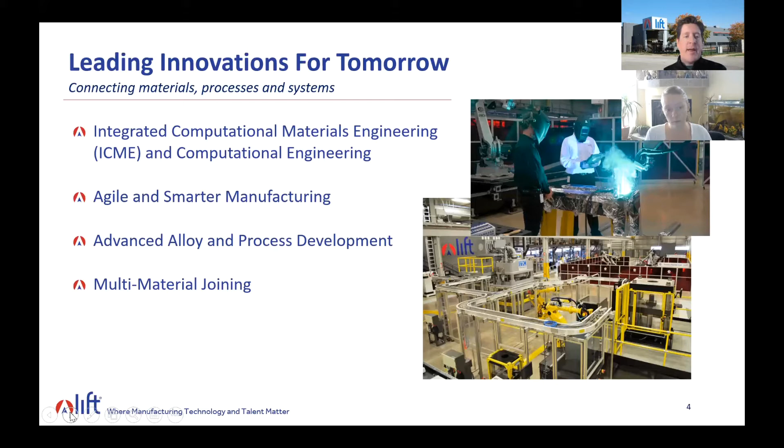So a little bit about the technology program. These are our technology pillars. All of the work that we do at LIFT falls underneath each of these categories in some way, shape, or form. All the way from integrated computational materials engineering to agile, smarter manufacturing, alloy process development, and multi-material joining.

A little bit deeper dive into some of these pillars. I'm not going to get into each of these, but if you have questions or would like to speak with someone on our team about any of these, please give us a call or shoot us an email. We'd be happy to reach back out to you and see how we can help. We can help you take your idea from concept to commercialization, further optimize it, whatever we might need to do to help you advance your technology.

On the talent side of the house, it is still about innovation, but it's more about learning tools, new pathways, new venues. We offer a program for high school students called Ignite Mastering Manufacturing. That is offered at our LIFT Learning Lab, which is in our facility, perched above our LIFT high bay. So the students come into our facility. Pre-COVID, we had 100 students a day from local high schools come and participate in the curriculum, hoping to get them back here as soon as possible. But students get to look out and see all of our technicians working on some of the innovations that we just referenced earlier. So very excited about that.

We also offer our own certification courses in some of the most in-demand jobs that are available in advanced manufacturing: CNC, welding, industrial technology maintenance, and the fastest growing field, which is robotics. We also offer those same majors through a program called Operation Next, which is growing across the country as well.

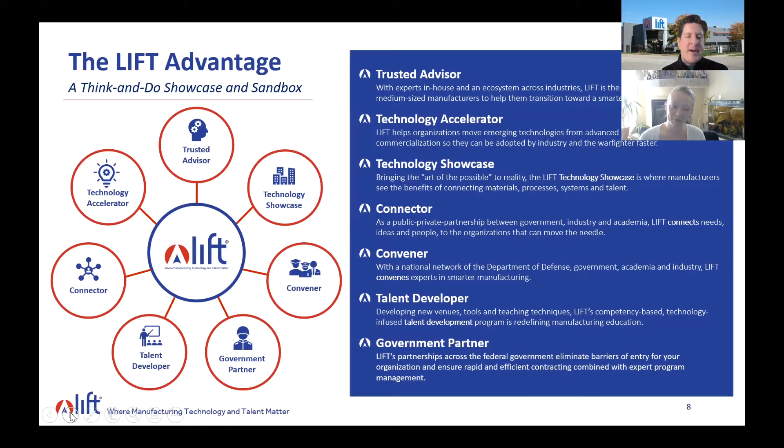A talent developer, I mentioned earlier, from the high school ranks all the way to adult learners to help people begin their career, advance their career in advanced manufacturing. And finally, we are a government partner. It can be unruly and unwieldy to work with the federal government. We know that, especially for small, medium-sized companies. So we can help you navigate that and help you become a part of that ecosystem, because we know that is where a lot of innovation takes place, is at the small and medium-sized companies.

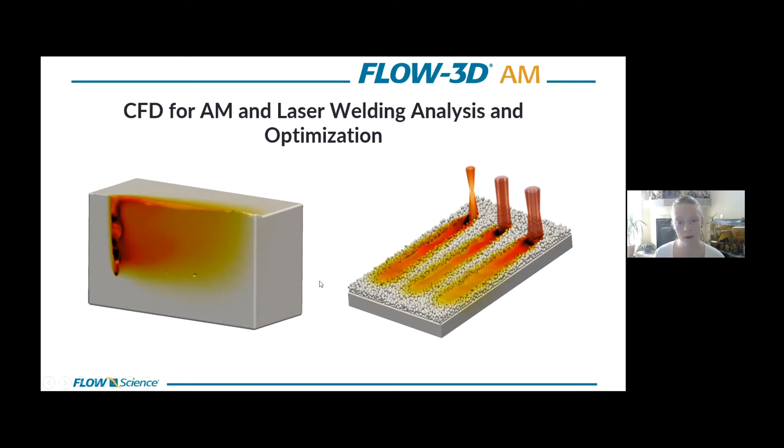So what we will focus on is computational fluid dynamics for modeling additive manufacturing and laser welding processes using Flow3D AM. So our agenda is pretty simple. We'll look at an introduction into Flow3D, look at some case studies from industry and academia that have been using this software for AM and laser welding studies. And we'll do an overview of features and capabilities within the software, and we'll also discuss a bit on workflow automation.

So just to give you kind of a baseline understanding of what Flow3D is, it's a CFD software specifically designed and suited for free surface transient flows. So it's based on the volume of fluid method, which in a nutshell is a computational method for tracking the evolution of the free surface, where you have a sharp gas-liquid interface, and it utilizes the concept of a fluid fraction.

So when you have a computational cell entirely filled with fluid 1, it'll have a fluid fraction of 1. Conversely, if it's entirely void or filled with your gaseous material, it'll have a fluid fraction of 0. And any intermediate value is where you know there's a presence of a free surface. So it's a very robust method for these highly transient sharp interfaces. And that's at the DNA of Flow3D.

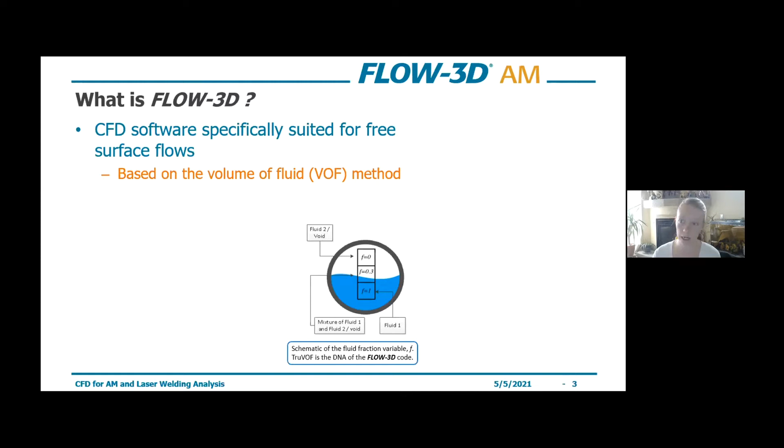I'll also mention Flow3D is of course based in Navier-Stokes, but on top of these numerical schemes we've built a wide range of different multi-physics capabilities. So for today's applications, we're primarily focused on phase change, heat transfer, surface tension, viscosity, solidification, things of that nature, but we've got a ton of other multi-physics capabilities for other applications as well.

And the products, so we have a family of products under Flow3D that relate to different application areas. And the products, of course, for AM and welding are going to be Flow3D AM, Flow3D Weld, and then Flow3D Post is our post-processing tool that you'll use for doing any sort of analysis, creating visualizations, things of that nature.

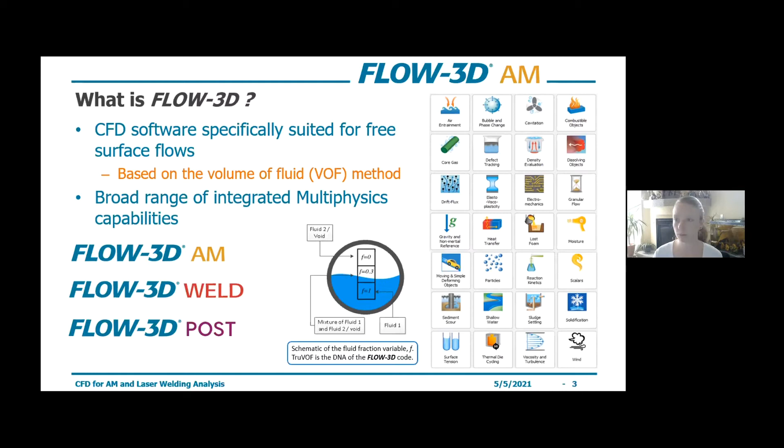So to give you an understanding of what I mean by free surface flow in practicality, here are a few examples. So we do a lot of work in water and environmental hydraulics type problems. So we've got lots of transient nature going on there, turbulence, whatnot. We also have a long history in modeling metal casting processes. So that's a low pressure die casting simulation there on the bottom right, capturing early freeze defect that was also

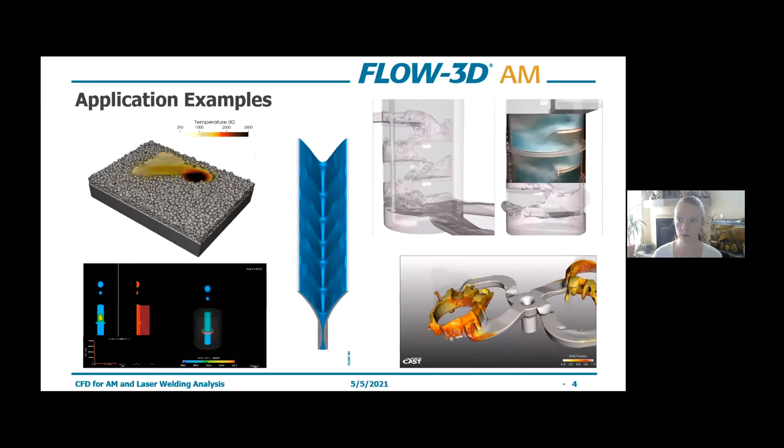seen in the shop. And then we also have a lot of experience in microfluidics applications, so surface tension driven flows like inkjets or coating applications. And all of this experience has lent itself into our more recent endeavor in the last 5-6 years or so in additive manufacturing and laser welding, such as laser powder bed fusion there in the top left.

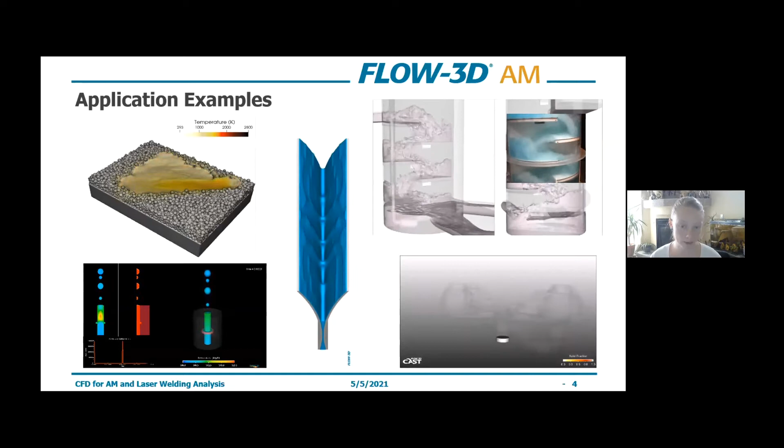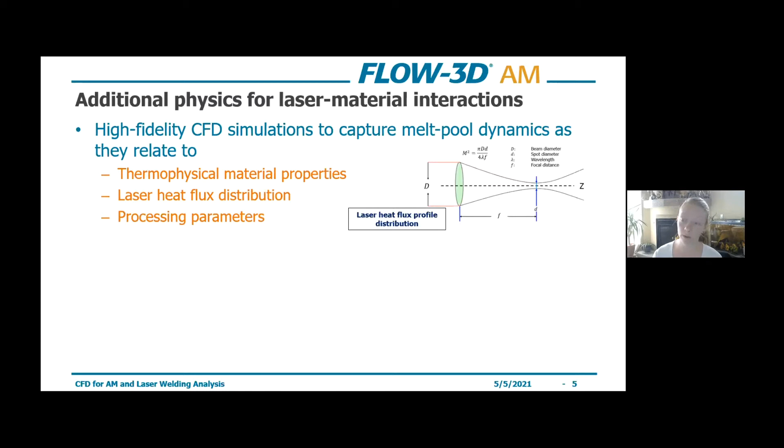So to capture laser material interactions in these laser-based manufacturing processes, we do need to account for some additional physics. And those are going to relate to thermophysical material properties, laser heat flux distribution, different processing parameters. So we define the laser heat flux distribution just as it is in reality. So we account for the beam, spot diameter, wavelength, focal distance. So really anything that you're working with, there's a lot of flexibility in how you can set that up in the software to accurately represent that distribution.

We also have the ability to really implement any type of laser motion that you can think of. It can be brought in as a CSV file if you're working at an angle, if you're doing some kind of new path design for optimizing microstructure or remelting, getting rid of void formation. It's all completely up to the user how you want to specify that beam motion.

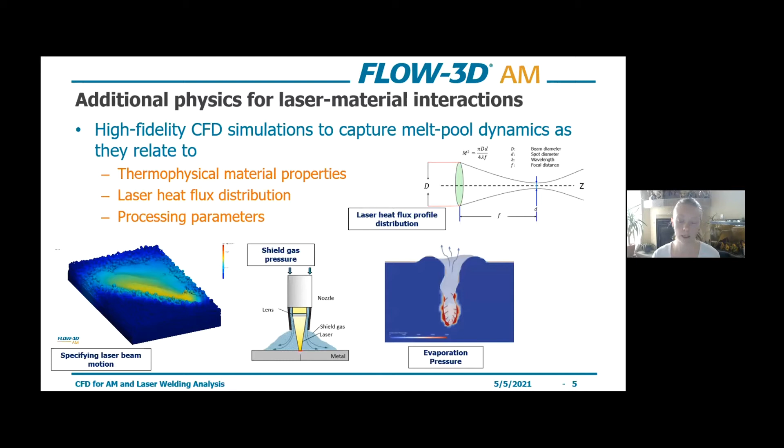We account for shield gas pressure as an additional pressure force on the surface of the material based on the shield gas density, velocity. So that's accounted for. Usually that comes up more in DED cases, maybe a little bit in laser welding. And then evaporation pressure is extremely important, also referred to as recoil pressure. So this is yet another additional pressure force on the surface of the material, and it's due to the rapid vaporization of the material as it's melting, and it can lead to keyholing, it can lead to morphology in the melt pool. So that's an important phenomenon that we account for.

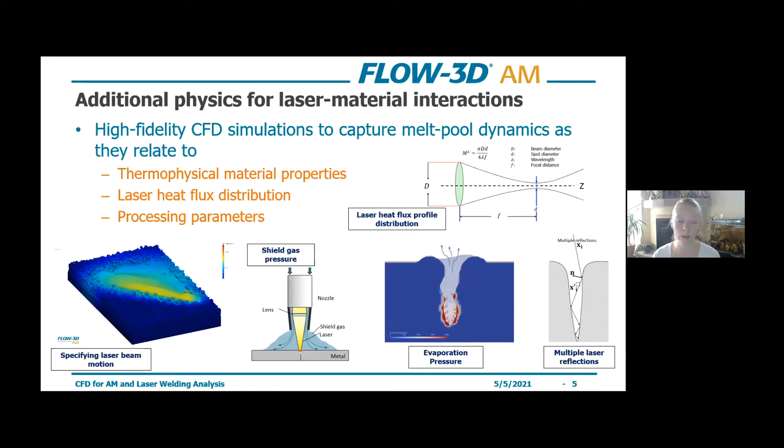And then lastly, multiple laser reflections. We do this via ray tracing, and it's important during keyhole welding where the multiple laser reflections will affect the effective absorption of the material from the laser. So we'll dive into some additive manufacturing, but really all of these physics for the most part lend themselves into the laser welding space as well. But we've got some examples here of AM, modeling AM processes.

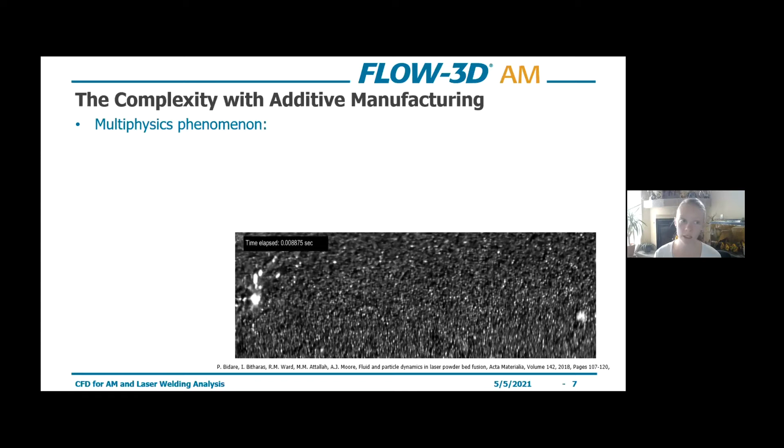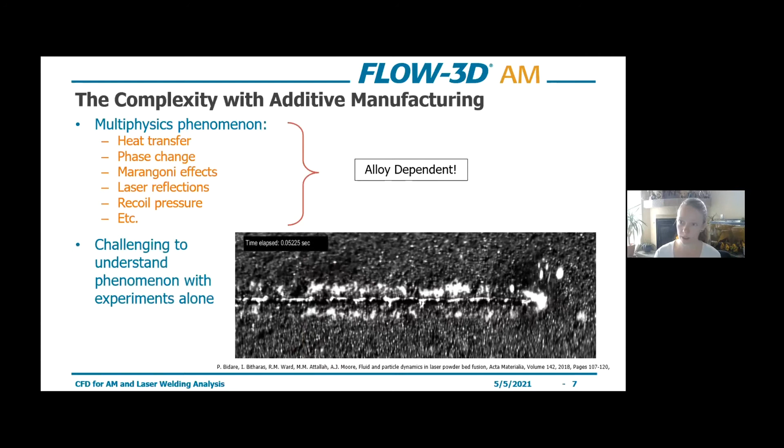So as all of you, I'm sure know, additive manufacturing is a very complex process. It's ultimately a multi-physics phenomenon. We're dealing with heat transfer and phase change and Marangoni effects, laser reflections, recoil pressure. So all of these things work together to lead to your final solidified part. And these can all be alloy dependent as well. So when you're working with different materials, or if you're exploring different processing parameters, working with different machines, there's a lot to consider. It can be very labor intensive when you're trying to analyze all of this using experiments alone, which is why we

often look towards modeling. So when looking towards modeling to capture these processes, create digital twins, do kind of end-to-end process analysis, FLOW-3D AM is one important piece of that puzzle, in that what we're really looking at is the micro and meso scales. So micro being the particle scale, where we're looking at recoater blade interactions, powder compaction, particle forces. And then at the meso scales, we're looking at melt pool dynamics, porosity formation.

And these results can be used to inform microstructure type analysis, and can also be used to inform part scale analysis, where these are typically based on FEM type frameworks, where you're looking at part scale thermal distortions, residual stresses, but you're no longer accounting for all of the fluid flow, which is what we focus on with the CFD side of things.

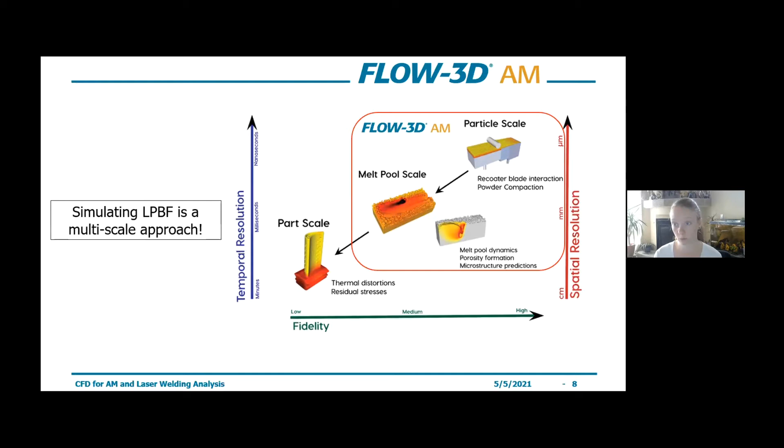So to give you an idea of how this kind of breaks down, for laser powder bed fusion, when we go through this modeling workflow, we start with powder settling and spreading. So we account for the powder distribution, any sort of cohesive, adhesive effects within the powder, maybe due to moisture, electrostatic forces. And ultimately what we're trying to get is that final powder compaction in the powder layer that we can then perform the melting simulations on.

So once we've completed this step, this is using the discrete element method. Then we extract that result into an STL, and then we do the melting simulation, where we are preserving all of the voids, all the packing fraction from the powder side of things.

The only limitation here is that we aren't accounting for powder movement as it relates to convective currents in the gaseous phase in melting, which can be important, but all of the other phenomena due to Marangoni effects, keyholing, solidification, cooling rates, all of that is captured in these melting simulations. So we're still getting very good information about the effect of processing parameters on the result, despite the fact that we're not quite accounting for that powder movement just yet.

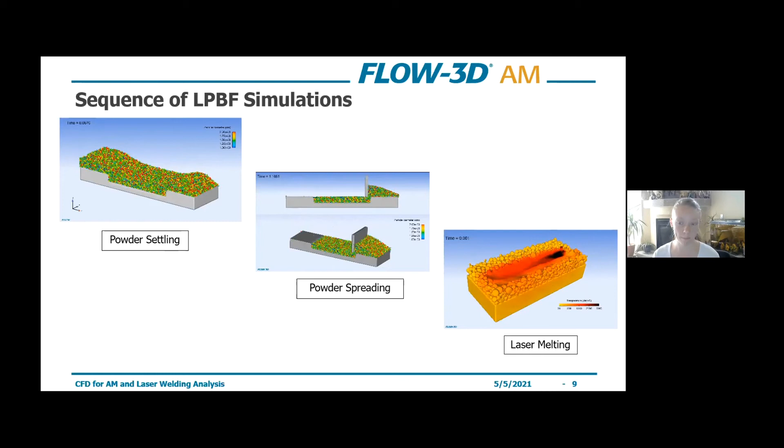And then ultimately, we're still working in the mesoscale range. So we can do a few different layers. There is a limitation just in terms of computational efficiency, and as time goes on, I'm sure that will improve. But right now we're looking more at a 3 to 5 layer kind of domain size. And we preserve the thermal history from each previous layer, so that in the subsequent layer, we're seeing the effect of remelting, any sort of void formation or mitigation.

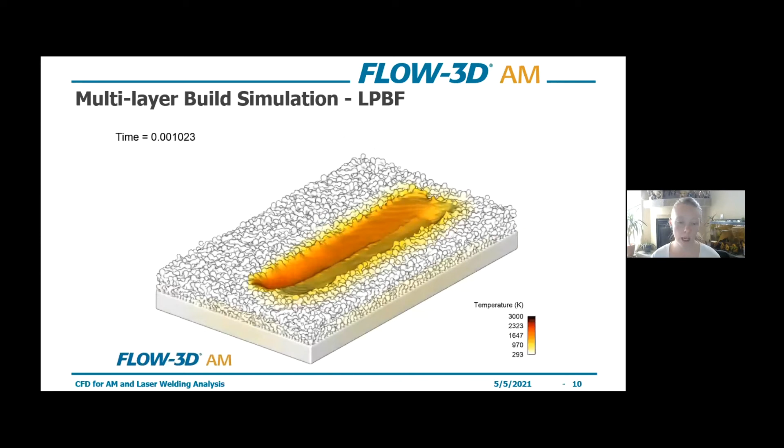There's a lot of phenomena that happen as you build layer over layer, as you would, I assume, guess. And that is all something we can capture in these melt pool simulations within a few layers. And then you can take it over to your FEA tool and ignore the fluid flow and kind of do the part scale build.

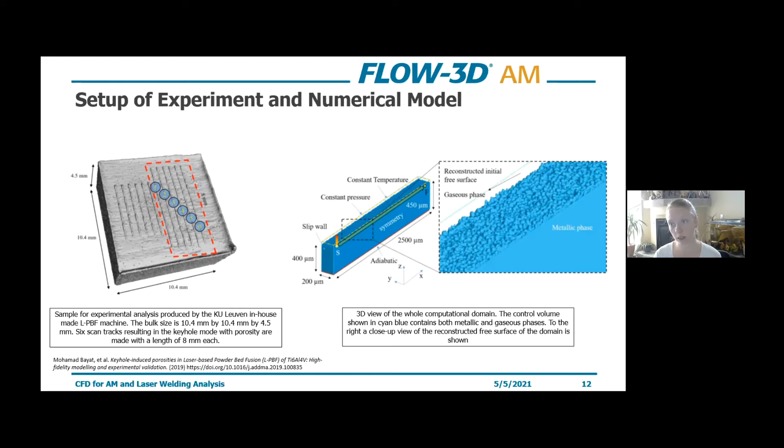So one of the key defects that I think everyone is always looking out for is porosity formation. Often this is a result of operating in a keyhole mode. So researchers at DTU did a numerical experimental study where they were qualifying the transition into keyhole welding and looking at the mechanism that leads to porosity formation from keyhole welding. So they used an in-house KU Leuven machine. They ran their experiments, and then they replicated the experiments with a numerical model and compared the results.

So when looking at these simulations, we can get a very good understanding of what is happening at any given time during this process, and what the mechanism that leads to porosity is. Once we transition into keyhole mode, you'll see this large keyhole opens up, and there's higher recoil pressure at the bottom of the keyhole, because that's where most of the heat is concentrated. And then because of the higher temperature at the bottom of the keyhole, we're going to end up with lower surface tension pressure. And conversely, at the top of the keyhole, you have higher surface tension pressure.

And this can form a cold zone, which can lead to momentary keyhole collapse, which is what leads to the initial pore that gets trapped in the melt pool. Once that pore gets pushed backwards from the strong downward flow in the molten pool, it'll round off due to hydrostatic pressure. It may be released at the top due to buoyant forces, but in some cases it's trapped by the advancing solidification front, and that's what leads to the porosity in the final part.

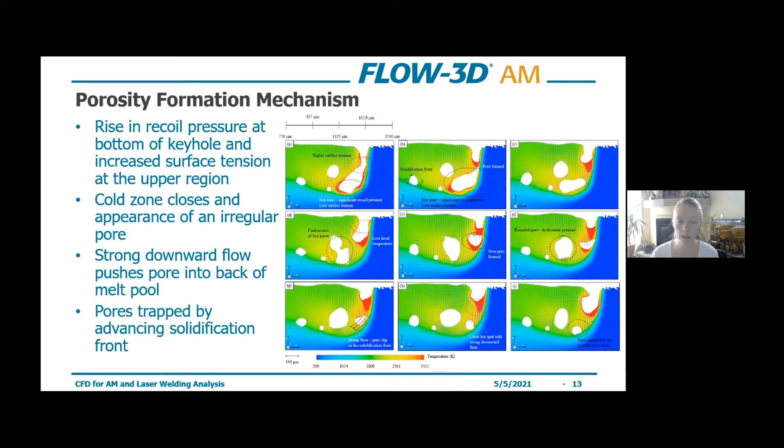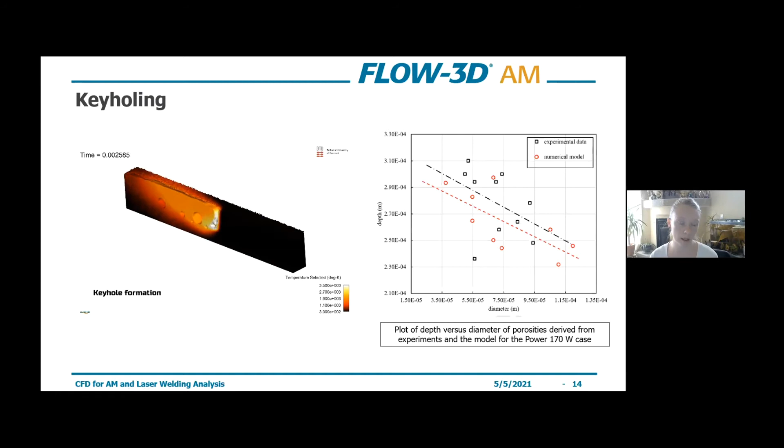Now, printing on overhangs is another area of interest that's been coming up more recently for us. I'm sure many people are looking into how you can print more detailed geometries, how you can go from one media to the next without leading to different kinds of defects that come with that territory.

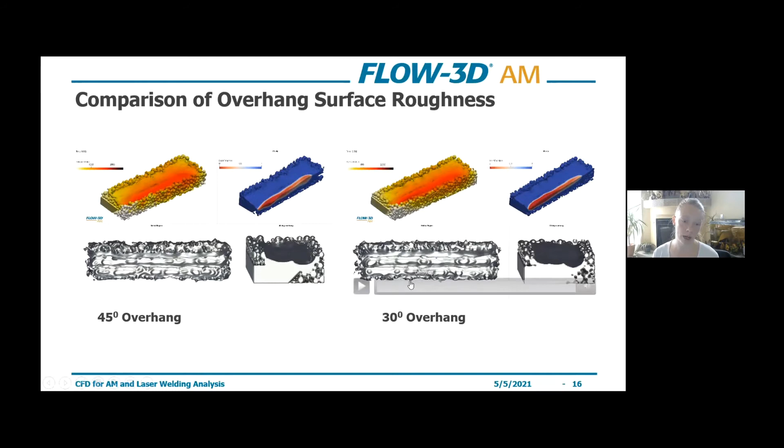So in this example, this is just a sample case of printing on an overhang where the first two tracks are on the solid base material, and then the third track is where you're going on the overhang where it's primarily powder. And then we're looking at the difference between a 45-degree overhang and a 30-degree overhang. And what we can do in Flow3D AM is extract the melted region, and then we can look at the downskin surface roughness to see what kind of fusion conditions we're getting, what kind of surface roughness we're getting.

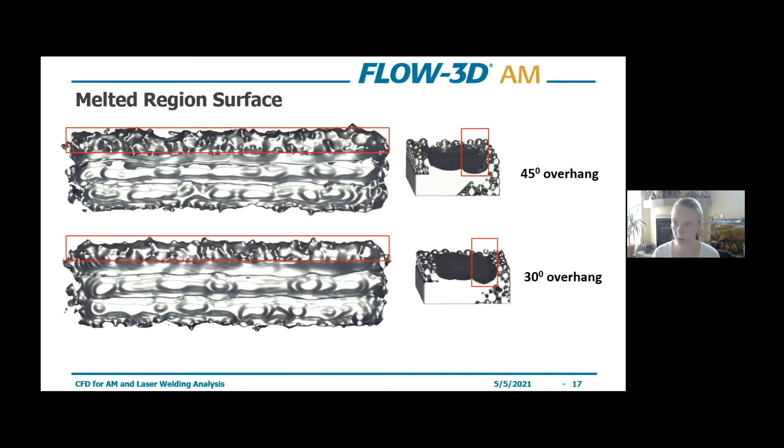And so you can see in the comparison of the two here that the 45-degree angle did lead to more surface roughness, lack of fusion, while we get better conditions for the 30-degree overhang, which depends on how much flexibility you have in your design. But there's things that you can analyze from a modeling perspective without having to make these parts out every time.

So researchers at DTU did a full-scale study where they looked at dross formation in printing on overhangs. So a different scenario from the previous case in that in this case, they're actually operating in keyhole mode. So once they hit the edge of that dense region and get into the powder region, well, for one, the thermal conductivity in the powder region is a lot lower because there's less contact between individual powder particles. And so the ability of the material to conduct the heat away is also lessened. And you get a lot more heat retention locally once you hit the powdered side of the domain.

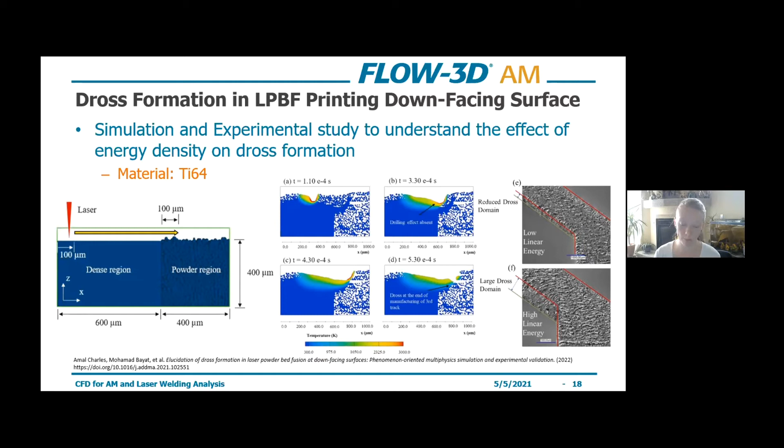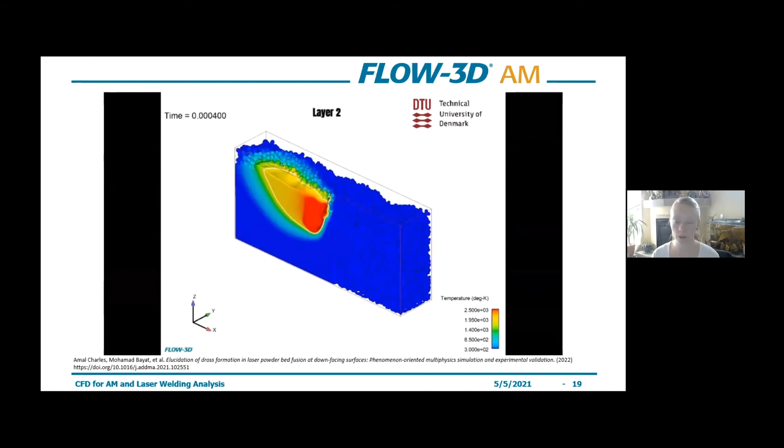And this leads to what they call dross formation, where you get this sort of drilling effect as you go over the edge from the dense to the powder material. And that can lead to undesirable fusion conditions and other defects that we're trying to avoid when going from one media to the next. So qualifying this, understanding what are the forces at play that are leading to this, what can we do to mitigate dross formation and create a more consistent print when you're going on to different medias.

What they have proven through numerical models is that with high energy density, so think higher power, lower speed, you're going to have recoil pressure dominant forces, and that'll lead to more keyholing. While when we have lower energy density, so lower power, higher speed, capillary and Marangoni effects will be more dominant in that scenario. So that's kind of what we're trying to gain. You have better process control when you're operating in the sort of Marangoni dominant realm for the most part.

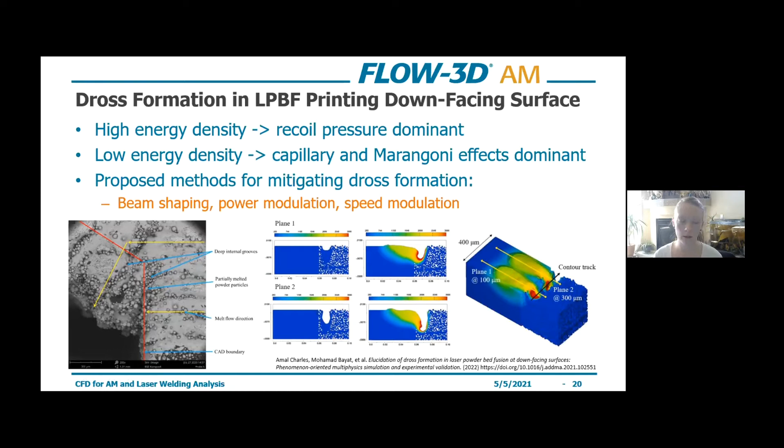So the proposed methods for mitigating this dross formation when you're going from one substrate to the next: beam shaping, which we'll look at next, power modulation, so turning down the power when you get to the powder layer, or speed modulation, so speeding up your laser, and that way you can avoid that drilling effect once you get to the overhang. And you can see from the experiments, they did a kind of quality check in terms of, do the simulations and the experiments agree in terms of the conclusions made, which there was good agreement here as well.

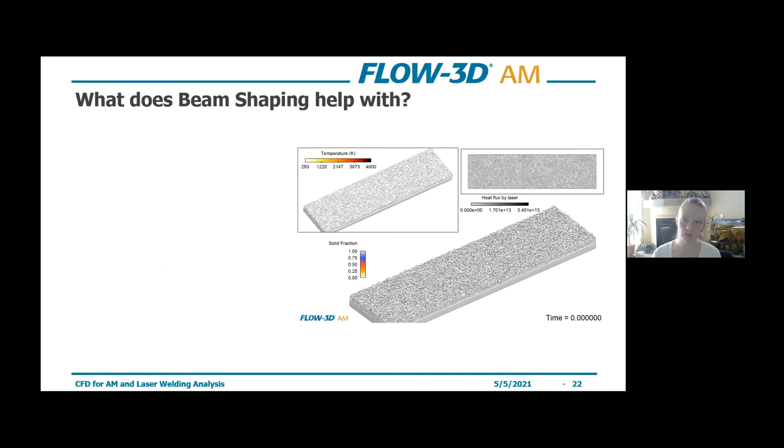So looking into beam shaping, which is, I think, becoming more attractive as a way to increase process stability and have a little more flexibility in terms of how you're printing. So what does it help with? Melt pool dynamics, having a more quiescent melt pool, having lower velocities just in general, and mass flux and vaporization. So we do want to kind of lessen this as much as possible. When you have high mass flux and vaporization, you're going to have higher recoil pressures, and that can lead to spatter, porosity, as we saw in the previous example, and some other issues. So beam shaping is a good way to increase process stability.

Ultimately, process stability is useful for getting the desired material properties in the final part. So we want to have better control over thermal gradients, less residual stress, better microstructure control. So all of these things are a little bit easier to maintain when you have more flexibility in your heat flux distribution. And then productivity as well. So when you're increasing the area of your heat flux distribution, oftentimes this can lead to printing over larger areas, increasing your scanning speed. You can also have more optical flexibility with beam shaping, especially with some of the new technology that's coming out with in situ beam shaping techniques, defocusing, things like that.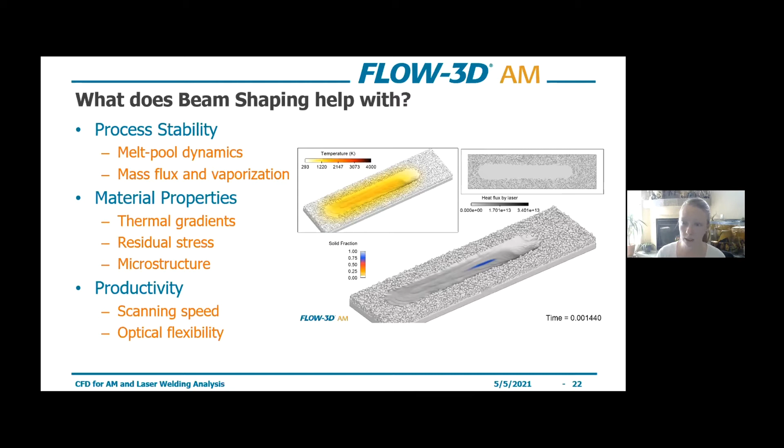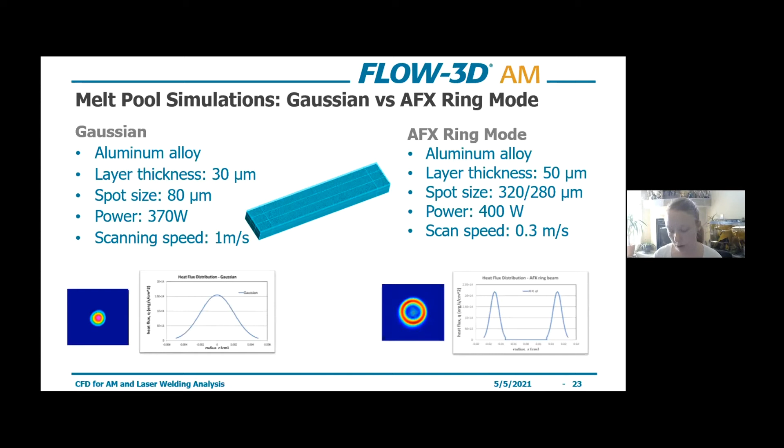So what we've been doing on our end is working with nLIGHT and Aconity. So nLIGHT is a laser manufacturer, Aconity is a machine manufacturer, and we've all been collaborating to run simulations for the AFX ring mode laser created by nLIGHT, and compare that to traditional Gaussian distributions and look at what are the effects in terms of the relevant forces at play, the ultimate thermal stress evolution and microstructure, cooling rates and things like that.

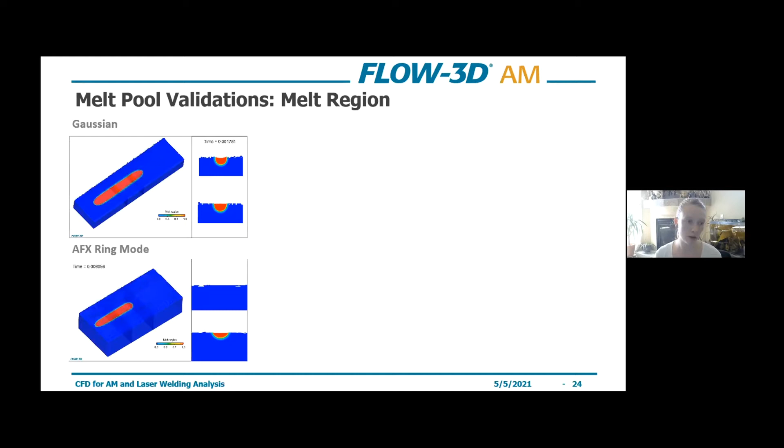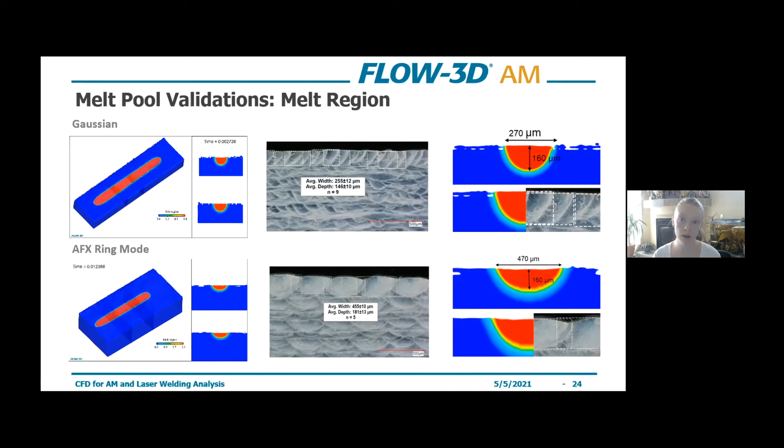So in setting up these simulations, of course, you always have to start with a validation. So we ran simulations for the Gaussian distribution and the AFX ring mode. Aconity provided us with cut cross sections from their experiments so that we could compare the width and depth with simulation and experiment. And then in doing that comparison, we can see that there is good agreement between the Flow3D AM simulations and the experiments provided by Aconity.

And qualitatively speaking, I will mention that we've done a pretty intensive webinar on this topic exactly. So I won't go into too much detail today, but just an overview kind of summary of what the findings were is that we can see from the experiment, if you look at the AFX ring mode here, the velocities in the melt pool are much lower than in the Gaussian distribution, which of course is going to lead to less spatter probability, just a more quiescent melt pool, less transition stages.

And similarly, the mass flux due to vaporization is much lower. So that's going to lead to less spatter, again, lower recoil pressures. And you can see from the experimental images here that the Gaussian distribution did indeed produce quite a bit more spatter than the AFX ring mode.

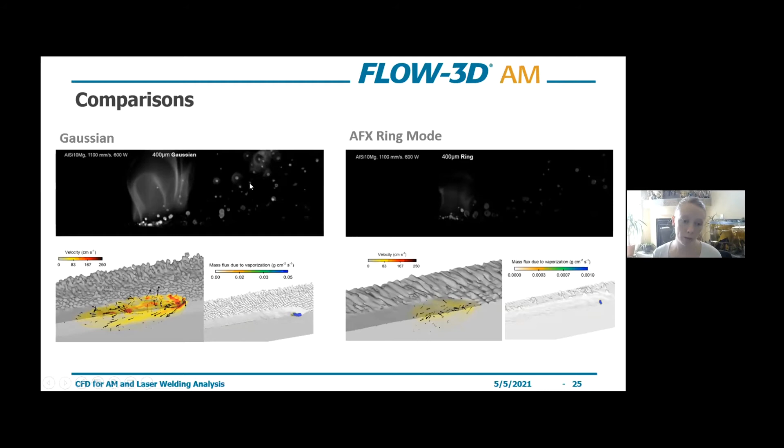Switching gears a little bit, we're going to look at two material printing and joining. So of course, that's an important aspect of manufacturing. Can we bond two materials? Can we mix two materials? How do we model this, understand this without entirely relying on experiments? So in Flow3D AM, we can look at 2 independently defined alloys. So all of their thermophysical properties are independently defined, surface tension values independently defined.

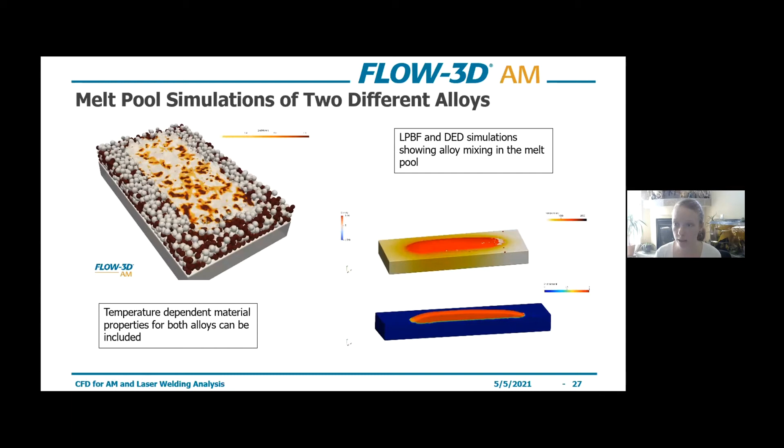And there's different ways we can approach this. So in the laser powder bed fusion example here on the left, we have evenly mixed copper aluminum alloys, and then we're just melting them. In directed energy deposition, where we have a powder or a wire feed that's being deposited onto a substrate, we can model mixed powder in the powder feed. We can look at having a different material as the substrate versus the powder feed, say if you're doing repair work in a cladding setting or something to that effect. So there's a lot of different ways that you can employ the 2 materials, but being able to capture their effects independently as they're joined together is extremely useful.

So in this study from researchers over at GM, they looked at laser welding aluminum and copper in a lap joint configuration. And what's important here is that you get sufficient mixing so that there's sufficient fusion between the 2 alloys, but too much mixing can result in detrimental intermetallic compounds. So finding that sweet spot, finding the threshold, and identifying the process parameters that are going to lead to that kind of place where we have sufficient fusion, avoiding the intermetallic compounds. We need to understand the effects of these processing parameters on the mixing, and modeling is a super convenient way to quantify that and look at the quality of the mixing at a very detailed level.

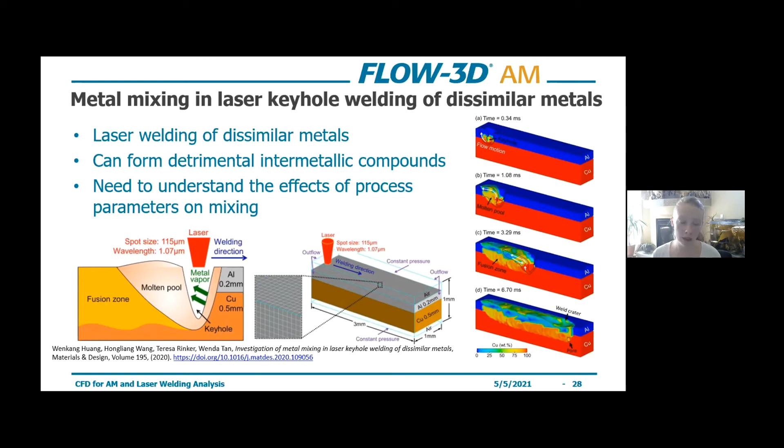So looking into their validations, what they compared was the EDS element mapping from experiments with simulation results from Flow3D AM. So if you look at these images, experiments on the left, simulations on the right, and what they're plotting here is the copper weight percent. So visually, we can see very good agreement between the 2. And they also looked at the concentration of copper at any given point along the X and Y axis, comparing simulations and experiment, which in both cases we have good agreement as well.

And what they found was that copper concentration above 50% at the top of the molten region was leading to increased cracks in the fusion zone. So they were able to use the simulations to identify processing parameters that would lead to sufficient fusion, but not reach that 50% threshold that would lead to cracking, so that they could optimize this process of joining the 2 materials.

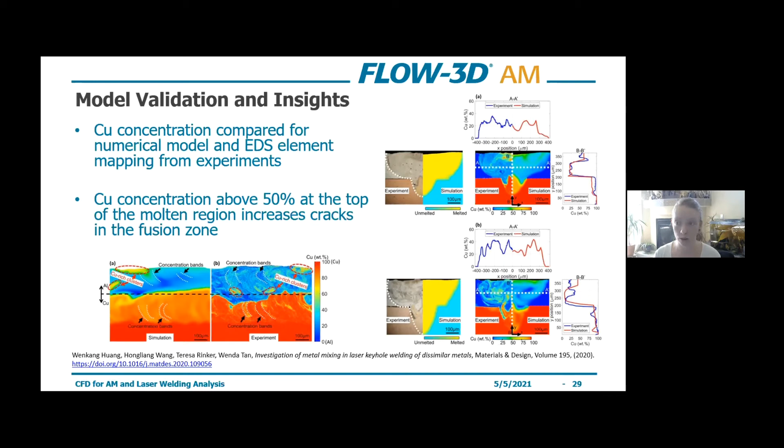I'm going into a bit on directed energy deposition, since I just gave you a taste of that. What we can do, as I mentioned, this can be wire or powder feed based, or both. There's some interest in hybrid systems. There's benefits to each, wire or powder, but by combining the 2, you can kind of reap the benefits of both. So there's some interest on that side as well, and we can look at that using computational fluid dynamics.

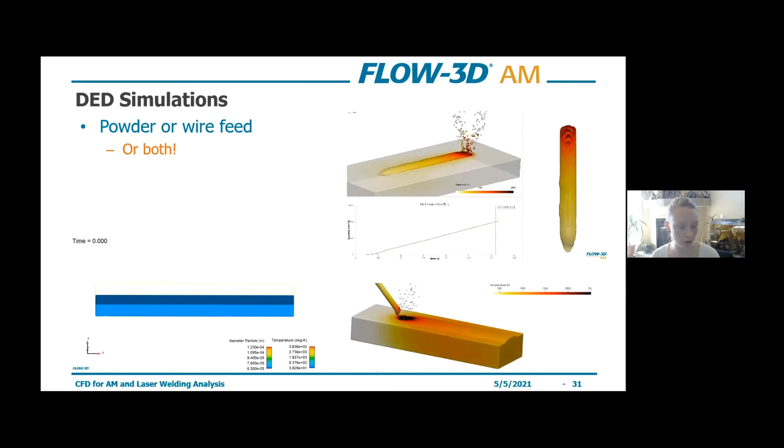And then we can also look at multi-layers in DED. So DED is a little bit more flexible in that the simulation runtimes are a little bit faster than, say, laser powder bed fusion. So we can look at a few different layers. The track width, the track lengths are a bit bigger, more in the few millimeters rather than usually less than a millimeter if we're doing a laser powder bed fusion simulation. So there's a lot of information to gain from modeling a DED process.

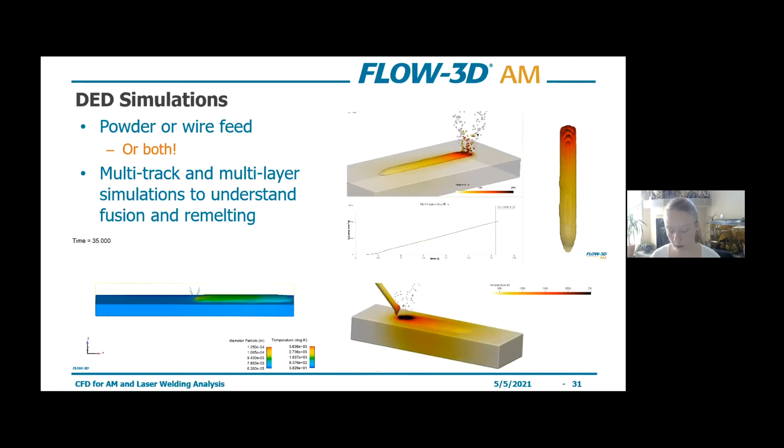And in this study from researchers at DTU, they were looking at the effect of the powder feed, the velocity of the powder feed on the melt pool dynamics in maraging steel, where the phenomena of interest is very much the same as other cases: Marangoni effects, recoil pressure, heat transfer, things of that nature.

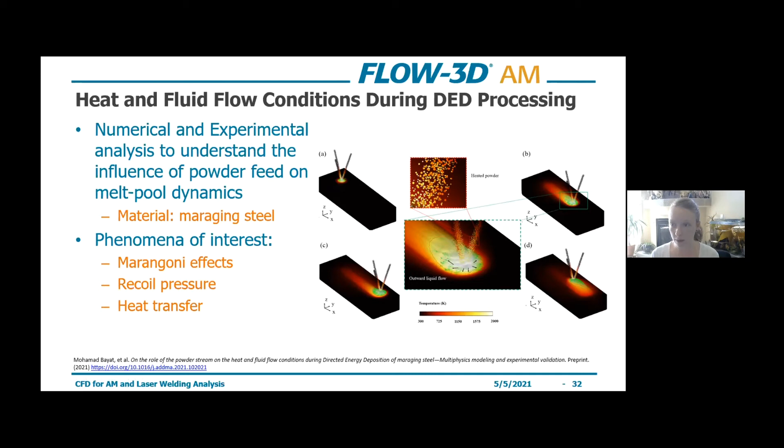But something to point out here is that even when we're working with a powder feed rather than using the discrete element method to do powder spreading like we do for LPBF, we're still accounting for the powder distribution as it is in reality. And then if you have mixed alloys, as I mentioned, we can account for that as well in the powder feed.

So in this case, they did a few different layers. So you can see there's quite a bit larger domain size that you can achieve when you're doing a directed energy deposition. Plotting the temperature here, so you can see as the powder particles come down and are melted by the laser, you can see their temperature heating up.

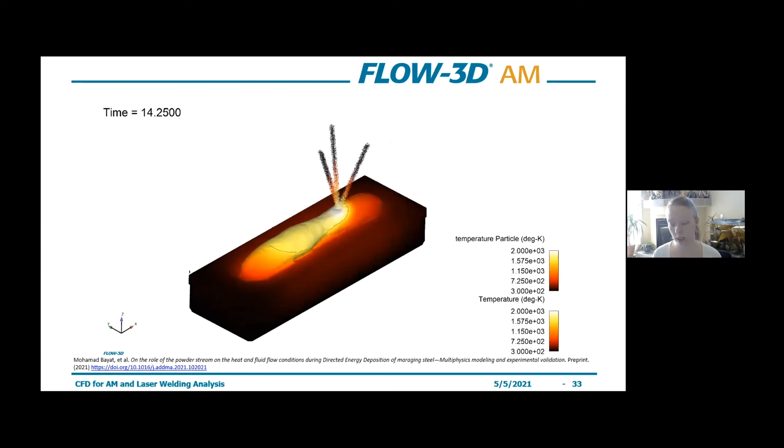Looking into their validation, what they did was compare the width and height of the solidified bead, as well as the melt pool dimensions during the process itself. So looking at their comparison of the width and height of the bead, the error percent was about 2.4%, 6.9%, which is pretty good agreement in terms of comparing experiment to simulation.

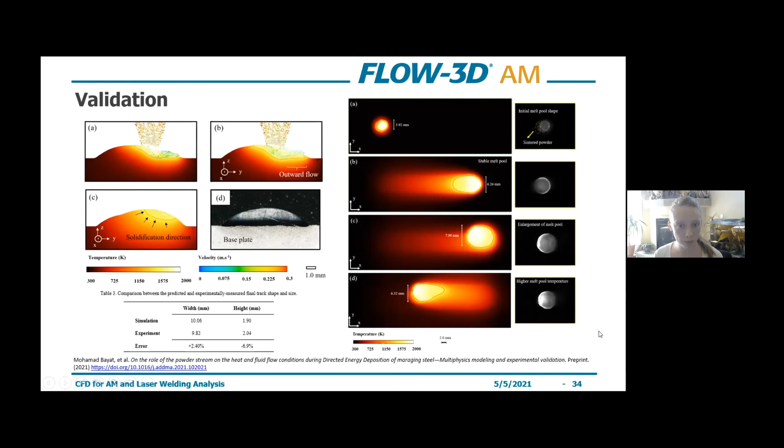And what they found was that the higher carrier gas velocity leads to an increased height to width ratio because of the less contact time that there is between the powder and the laser when they're working with a higher carrier gas, because the powder is coming down much faster, being melted faster, so there's less contact time. And then they also found that the track wettability will decrease when you have an increased carrier gas velocity. So this all comes back to whether Marangoni effects are dominant, whether recoil pressure effects are dominant.

So the important takeaway from this study is that track morphology and production rates can be manipulated by the carrier gas velocity. So usually we're looking at power or speed to change the dimensions of our tracks. But in directed energy deposition cases, we have that additional parameter that we can look at, the carrier gas velocity, which has quite a big impact on the morphology of the track.

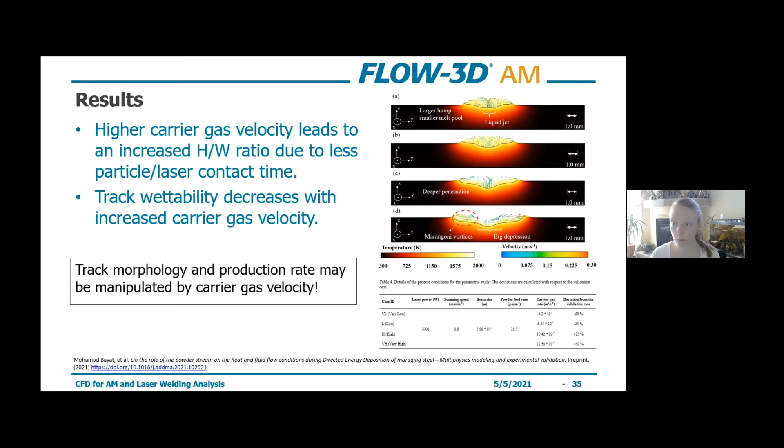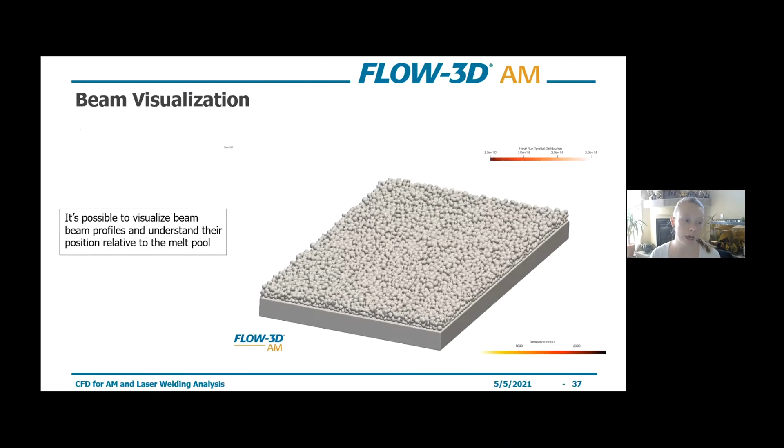So some useful outputs that we can look at as well. We can visualize the beam profiles. This is useful for understanding the laser material interactions visually. Also kind of a sanity check when you're doing your simulations, make sure that your laser is oriented correctly, defined properly. If you have it at an angle, things to that effect, it's very useful to be able to visualize the beam in the simulation.

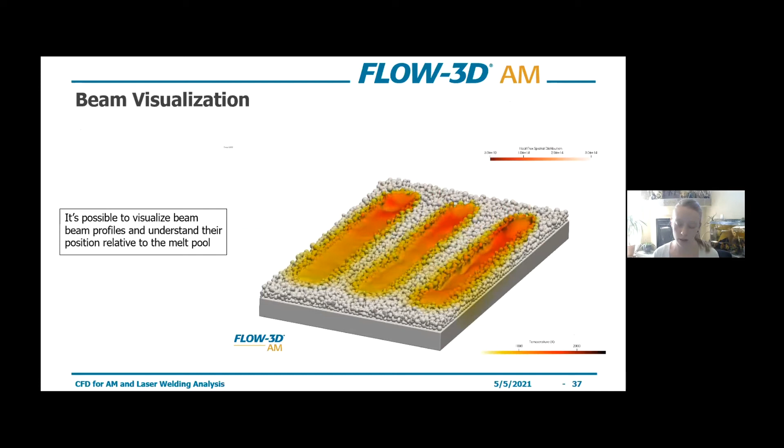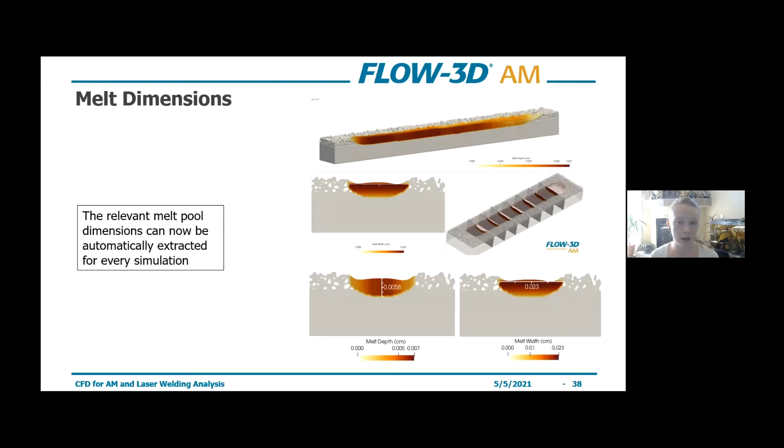And then we can also output the melt pool dimensions. So height, width can be extracted automatically. And you can use that when developing process windows. You want to understand what dimensions you're getting. You can also use it as an optimization parameter, which we'll talk about a little bit here at the end. So that's a useful output in terms of just understanding immediately what effective dimensions you're getting.

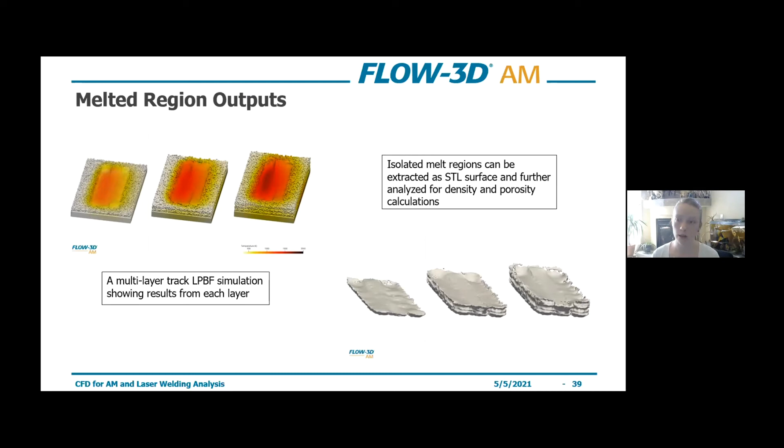And then we can also extract the melted region itself, as I mentioned earlier. And this is useful in understanding the effective part density, doing porosity calculations, understanding surface defects and morphologies. So there's a lot of information that can be gained just from extracting that melted region and neglecting the unmelted powder.

And then we can also extract temperature gradients, cooling rates. So these are the outputs that are typically used to inform the next leg of analysis, whether it be microstructure, thermal stress evolution. So those are outputs that are readily available to you.

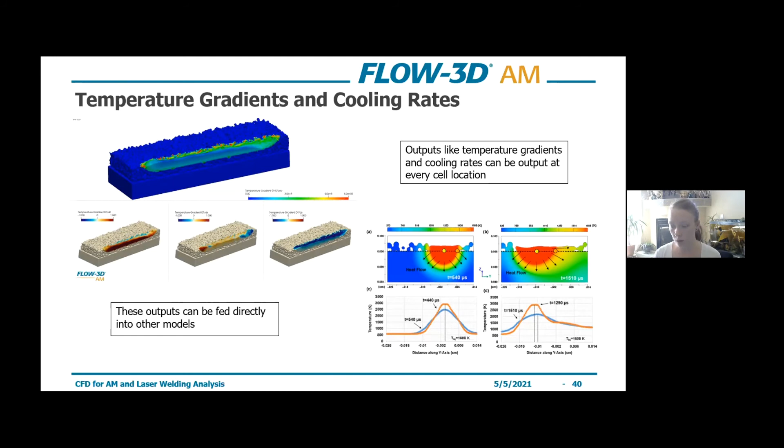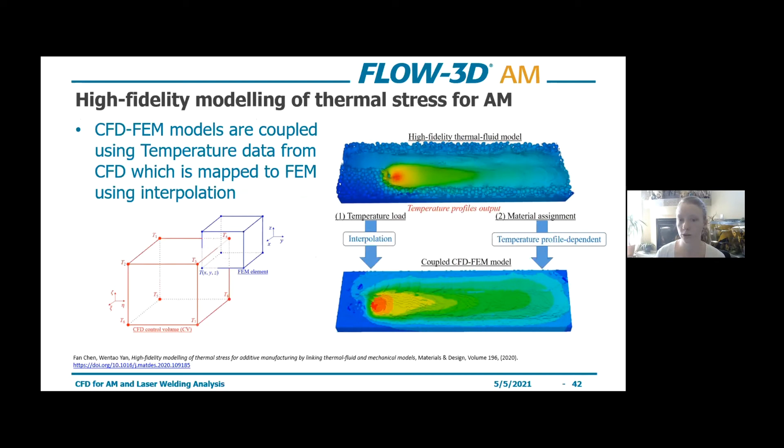And to give an example of taking the CFD results over to an FEA analysis, researchers at National University of Singapore, Wentao Yan's group, developed an in-house custom FEM model, and then they mapped the thermal fluid simulation results into their FEM model to understand thermal stress evolution for a few tracks.

So you can see from the results here, by plotting tensile and compressive stress, that where voids are forming, we're getting higher tensile stress values. So that's a good indication: if you're seeing high tensile stress in your FEA simulations, then you can reasonably assume that that's going to be the location that cracks will form, if they do.

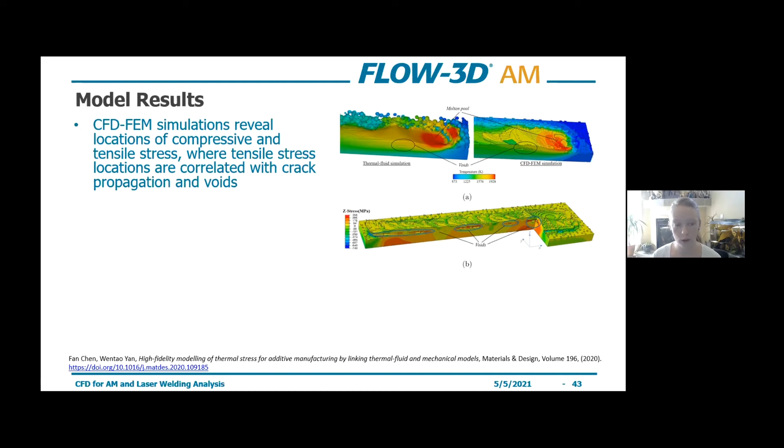And then we can also understand the effect of a few different layers. So once you deposit a second, third layer, you'll have some remelting. Some of these defects will be fixed. Some of them will be accentuated. So there's a lot of information to be gained from simulating a few tracks and then doing the thermal stress analysis on that part.

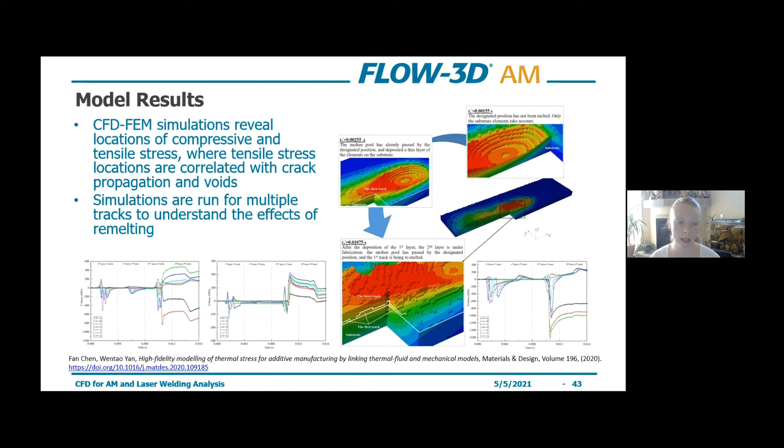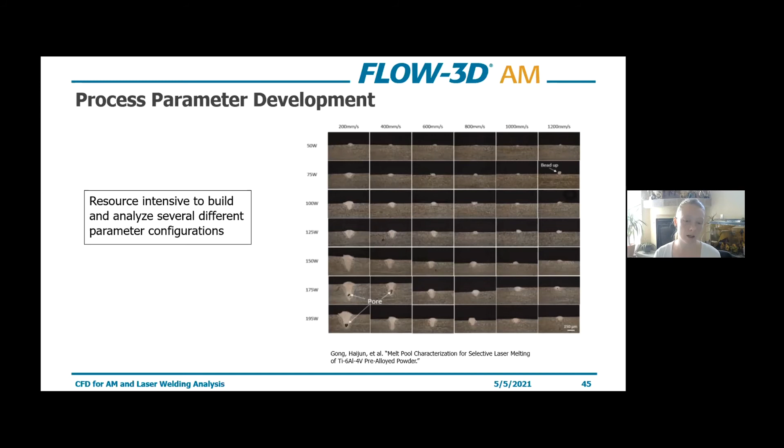And then we'll touch lastly on a bit of workflow automation. So as I've mentioned a lot during this presentation, a lot of the interest is in process parameter development. It can be for new alloys, more commonly used alloys, but a new application. There's a lot that goes into qualifying the process parameters and understanding the effect of different combinations.

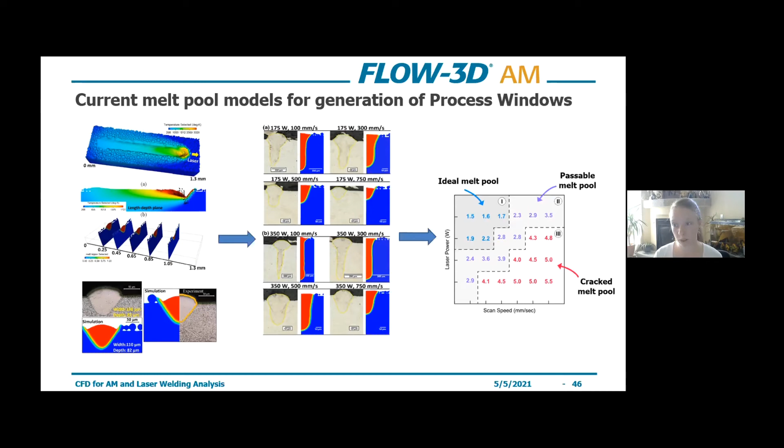So using melt pool models to do this, as you've probably inferred so far, we start off by doing a validation, compare with experiments, make sure everything looks good. Then you can do simulations of different process parameter combinations. And ultimately, we're trying to develop that process parameter window to identify those parameters that will lead to conditions which are favorable and which will lead to conditions which are unfavorable, and we should probably not use those parameters.

So there's lots to consider here. Laser power, scan speed, heat flux distribution, whether you want to be in keyhole mode or conduction mode, what kind of atmospheric conditions you have, what are your material properties that you're working with. So doing these types of parameter studies for a variety of different alloys can certainly add up, especially when you're dealing with experiments alone, but also when you're doing an iterative approach with simulation.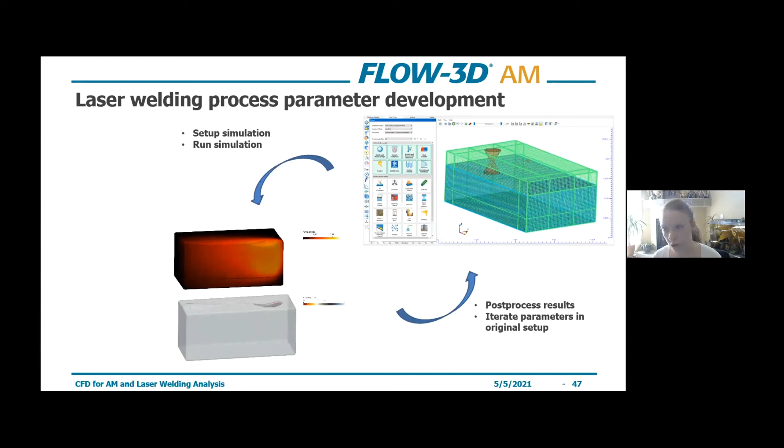So the way this works from a simulation perspective is you set it up, you run it, you do your post-processing analysis, you go back to the original setup, you iterate on the parameters, and then you go through again and again, which definitely saves time in general, but can be a bit cumbersome when you're wanting to test 50, 100 different combinations.

So what we've developed is a tool called FLOW-3D (x), which is used for automation and optimization. You can just import all of the parameter combinations that you want to test into the software, or you can put them in manually. And then you'll set up a simple workflow where you have certain input conditions that you're interested in studying, and then certain outputs. Say you want to look at melt pool dimensions or porosity formation, you can choose that as your output metric.

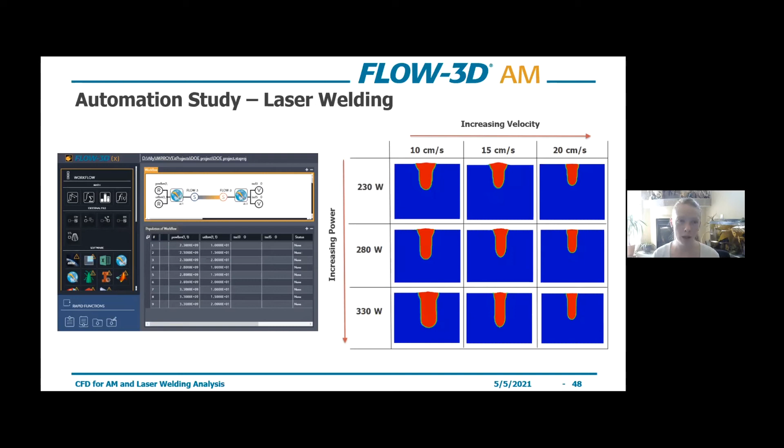And then you just run these simulations, you hit go, and the software will go through each parameter combination that you've specified. There's no need for you to go in and manually set up each input file. And then at the end of the day, you get all those results, as well as animations or images if you want to tie it to our post-processor. So it really saves a lot of time when you're trying to develop these process windows.

So in summary, we've really found that CFD simulations are providing valuable insights into these processes, and that relates to both the AM side of things, laser powder bed fusion, directed energy deposition, as well as laser welding. In the case of AM, you want to look at powder compaction, spreading, powder interaction. In both cases, you want to look at melt pool dynamics and prediction of defects. We want to extract relevant information to use in subsequent models such as microstructure prediction and residual stress analysis.

And then using workflow automation, we can develop these process parameter windows or welding schedules in a very efficient manner, where we're able to tie it all together and provide some valuable insights into how to bring these processes into production.